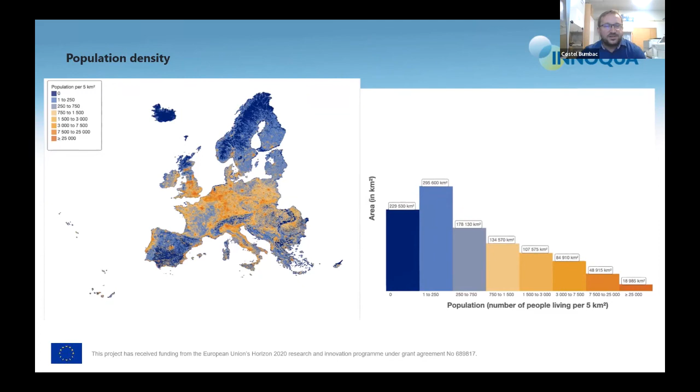Where there is a low proportion of population connected to wastewater treatment facilities, it may be because of lack of financial resources or priority for providing sanitation services, low population density, or too high a proportion of the population living outside agglomerations.

This low level of connection to wastewater treatment systems is caused by a combination of the three factors mentioned earlier, especially the low population density and the high proportion of the population living outside agglomerations.

For the case of Romania, approximately half of the population lives in a rural environment, and only 10% of them are connected to central wastewater treatment systems.

In dispersed communities, wastewater collection infrastructure may prove prohibitive in terms of cost, and the cheaper alternative could be the installation of several individual, group, or cluster sanitation systems adapted to local conditions.

Once the issue of big contributors to pollution load, agglomerations above 150,000 and above 10,000 people equivalent, is solved, the focus of investment will be the smaller agglomerations of 2,000 to 10,000 people equivalent and less, in order to achieve urban wastewater treatment objectives, and why not the United Nations Sustainable Development Goal 6, sanitation for all. A combination of drivers, including utility market restructuring, water and wastewater directives, and improved efficiency, have encouraged cities and public water utilities to resume the most aggressive investment programs Europe has seen since 2007.

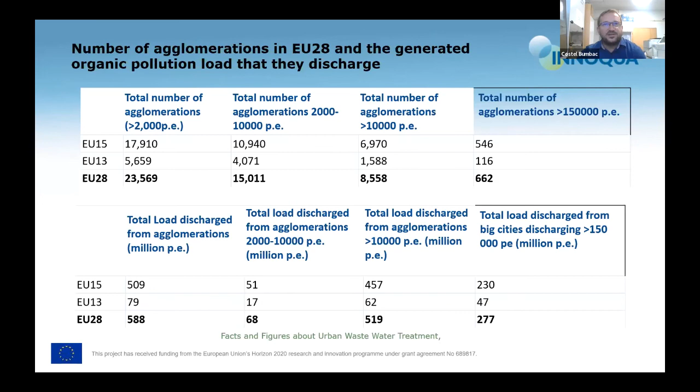Bluefield Research anticipates annual water infrastructure investment to increase by 23%, from 46 billion euros in 2015 to 57 billion euros in 2025.

In many countries, small communities are required to treat wastewater discharges to increasing standards of lesser environmental impact, but must achieve the goal at locally sustainable costs.

While biological treatment such as activated sludge or membrane bioreactors are quickly becoming the industry standard for centralized wastewater treatment plants, and would also be ideally suited for small plants, its investment and operation costs are usually too high for that class of application. It is not always appropriate to connect to the public wastewater treatment system, for instance in remote areas or scattered communities with low population density.

Suitable alternatives to connection to the public sewage system may include individual sanitation systems, packaged wastewater treatment plants, or nature-based solutions such as vermifilters, drain fields, and even septic tanks with regular removal of solid waste would be better than nothing.

Consequently, small treatment plants are generally configured as anoxic or aerated biological tanks with little sedimentation, making them quite susceptible to hydraulic load changes, sludge quality changes, and consequently performance loss.

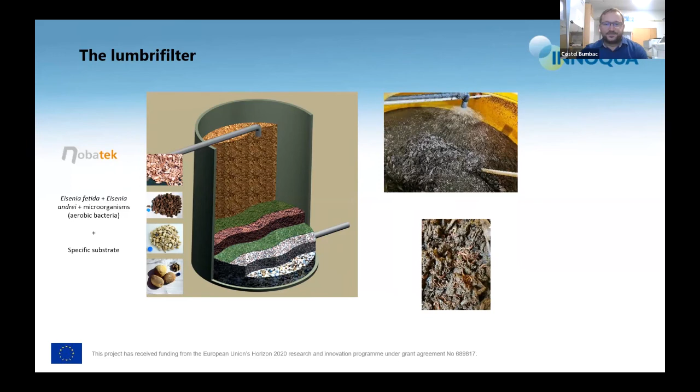Constructed wetlands are designed to use the natural functions of wetland vegetation, soil and their microbial population to treat wastewater. Even though sometimes nature-based solutions represent a more expensive approach for wastewater treatment, analyzing the merits and drawbacks of the various NBS in view of their sustainability potential might lead to the conclusion that natural-based solutions could be the way forward towards the goal of sanitation for all.

Encouraging the development of local water cycle clusters with local reuse and recycle of the resources, and possibly local recovery of energy and/or materials.

I would be happy to answer any questions if you have. We will also have more chances for us to ask some questions to Costel. I don't know if there was anybody who would like to address some questions at this point. If not, Costel, thank you.

I think this presentation clearly shows the grounds to work on sustainable and affordable solutions, especially for dispersed communities. So in an attempt to tackle this problem, the INNOQUA project investigates the applicability and potential for nature-based decentralized solutions.

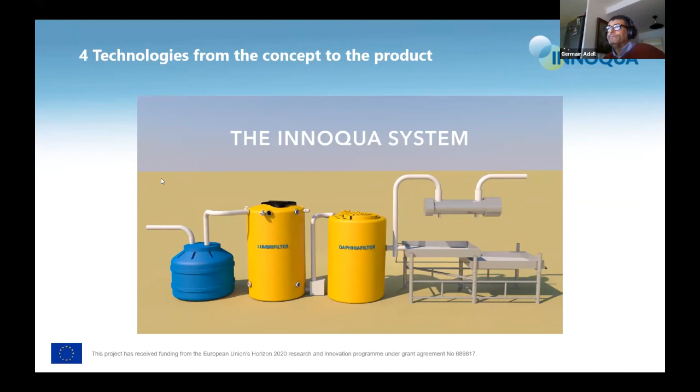So we have 4 technologies, and from that we brought the concept to an industrialized product. You see here the Lumbrifilter, the Daphnia filter, the biosolar purification, and the last stage with the UV filter. So here are the technologies.

I won't comment a lot on them, but the Lumbrifilter, slightly presented by Costel, is a primary and secondary treatment based on the activity of earthworms and bacteria.

The Daphnia filter is a tertiary treatment. For us, in the modular technologies, we always had the Lumbrifilter as a first stage, then the Daphnia filter. Daphnia are little crustaceans that feed themselves on very fine suspended solids.

Then we have the alternative of using the Daphnia filter or biosolar purification, an innovative treatment using solar activity and biofilm - biofilm microalgae that remove some nutrients and pollutants - and then, when needed, we can have UV disinfection as the last stage.

So all this makes a modular system that, of course, at a certain moment we have had to plan how we demonstrate it. So here you see this was already demanded or suggested by the topic at the time. The topic suggested that we could invite extra-European partners, and so we really did that. We went for that because we consider that sanitation is a global problem.

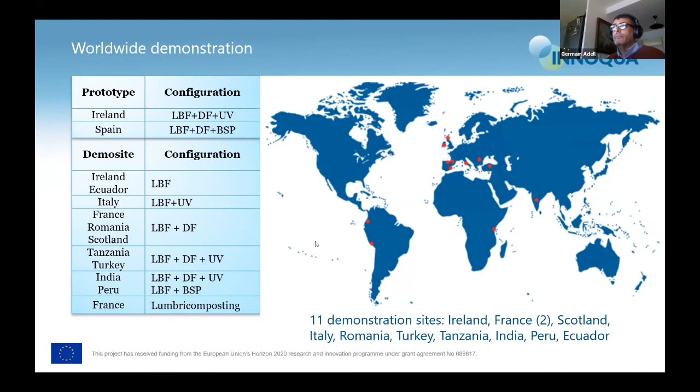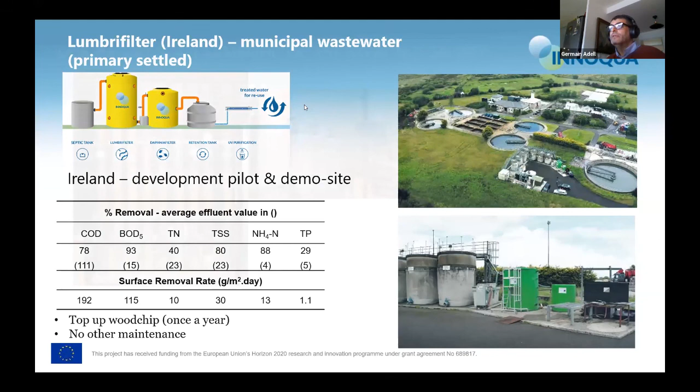So of course we had all the wastewater we needed, and NUIG worked with the full system, testing it, developing the substrate, gathering scientific information on the system and testing different solutions. So here you can see their testing of different layers of wood chips or substrate. It was really very thoroughly analyzed and developed by NUIG. So we ended up improving the first idea we had as technology provider, thanks to the help of NUIG and other partners. They also had an agricultural demo site, cattle farming.

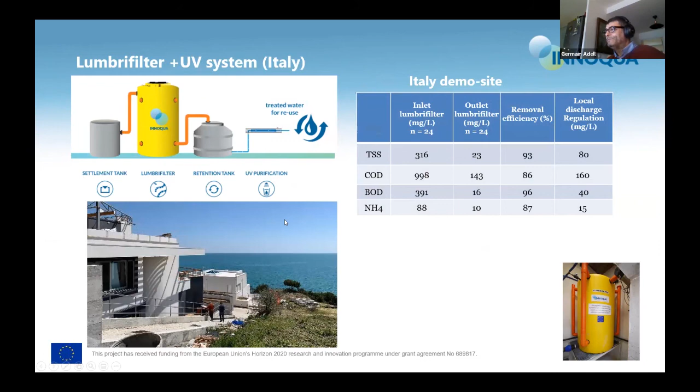If you have any questions, Costel will be more than able to comment. And perhaps, Costel, I would like you to comment. The last two slides are the results of the pilot sites. Costel has been the pilot manager of the full project, and I think he's more qualified than myself to comment on the last two slides, which are the summary of what the project team found out after the demonstration phase.

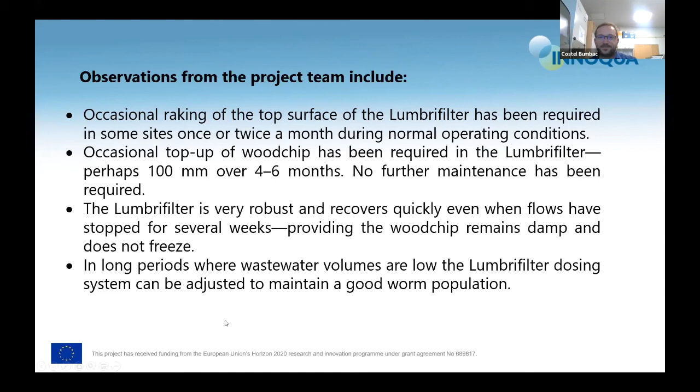On the other hand, the Daphnia filter requires a little detailed attention at startup, as Daphnias are known to be sensitive species. They are usually used in ecotoxicity studies. And at the same time, the coexistence of macroalgae or even water plants in the Daphnia filter improves the reactor nutrient uptake rates.

On the other hand, the performances of the biosolar purification, which is the microalgae-based wastewater polishing step as a module in the INNOQUA system, the performances of the BSP are dependent on maintenance, meaning that the microalgae biofilm should be occasionally raked and removed in order to keep the nutrient uptake rate, as the main mechanism of nutrient uptake in the microalgae-based wastewater treatment system is by biomass uptake.

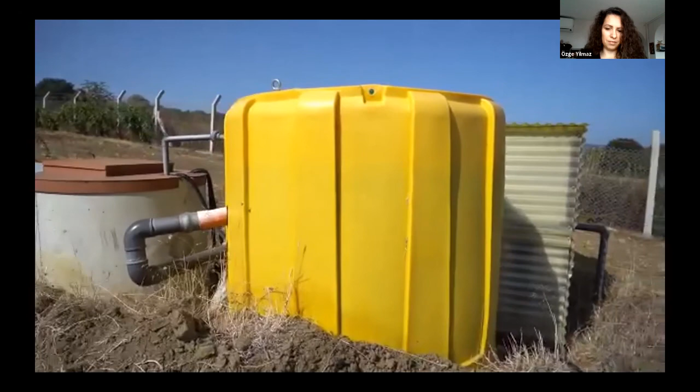The SINOP demonstration is to assess the potential of INNOQUA technologies in residential housing, as well as potential for reuse in irrigation. Our system here includes a lumbrifilter, a Daphnia filter, and a UV unit. The INNOQUA system is located in a housing complex with 8 detached houses and hosts up to 55 people. The wastewater is of domestic origin, coming from the bathrooms, toilets, and kitchens. And the INNOQUA system here has a design capacity of 3 cubic meters per day.

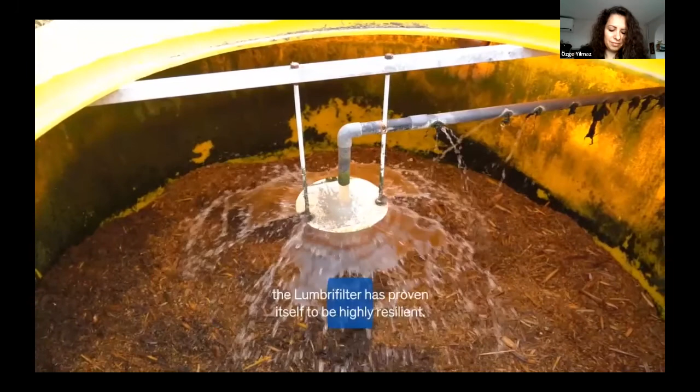The lumbrifilter presented the benefit of reduced maintenance and operational costs. Throughout the operation, even with varying quantities of wastewater, the lumbrifilter has proven itself to be highly resilient. The Daphnia filter performed an important role as an innovative bio-based tertiary treatment, which avoided use of chemicals for treatment and also supported the reuse of treated wastewater on site. Turkish regulations on water and wastewater are especially strict in terms of the presence of pathogens if the wastewater is to be reused for irrigation. With this UV unit, we were able to disinfect the treated wastewater, comply with the regulations and ensure safety of the reuse.

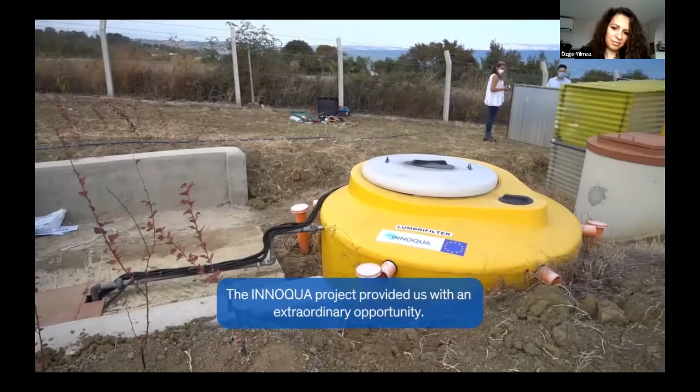So this portion of the conference is dedicated to us, Costel and me, trying to give you some information about our respective demo sites. So I will start with Turkey, and Costel will go on with the Romanian demo site. Sinop is located on the northern tip of Turkey, on the Black Sea coast. It has a population of about 200,000 people living in the city center and nearby villages. Almost 90% of the population have access to the sewage system, but 10% of the population use septic tanks as their main form of sanitation.

The septic tanks usually infiltrate, so we can easily say that the water is infiltrating into the groundwater without any treatment. So instead of the wastewater in the septic tanks being collected, it goes into the ground. So our beneficiary was this site, which hosts up to 55 people. It's a residential complex with 8 detached houses.

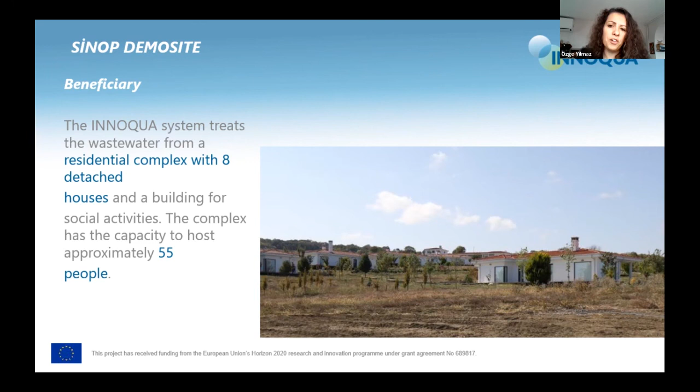The site owners are very aware of the possible environmental pollution they might be creating while living in this housing complex. It's actually a new complex being established, so some settlement started at the beginning of the project, but we did not reach full settlement. Not all the houses were occupied until the end of the project. So this site is still under development, but they wanted to make sure that an affordable treatment system was ready on site for them to be using.

The system that we implemented on site, as you have seen in the video, has a capacity of 3 cubic meters per day. The source of the wastewater is very domestic. What we wanted to do was to assess the potential of the INNOQUA technology to be implemented in residential housing.

Of course, one interesting point for this demo site was the site owners really wanted to use the wastewater after treatment for irrigation purposes. They had some orchards, and they have some green areas that they wanted to use the wastewater for irrigation.

For this purpose, it was found out that the best configuration was to use the Lumbrifilter, the Daphnia filter, and the UV purification. Disinfection was especially necessary because the Turkish legal limits for reuse of wastewater are rather strict, so we needed some sort of disinfection at the end of the treatment.

As I said, unfortunately, not all the houses were occupied throughout our demonstration, so the influent was significantly lower in terms of both concentration and volume expected. And also one side information, Sinop, the Black Sea region in Turkey, receives a lot of rain throughout the year, especially in autumn and winter. So we also have a lot of stormwater, rainwater infiltrating into the sewage that also caused the concentration to go even lower. After the first 160 days, we needed to find a solution.

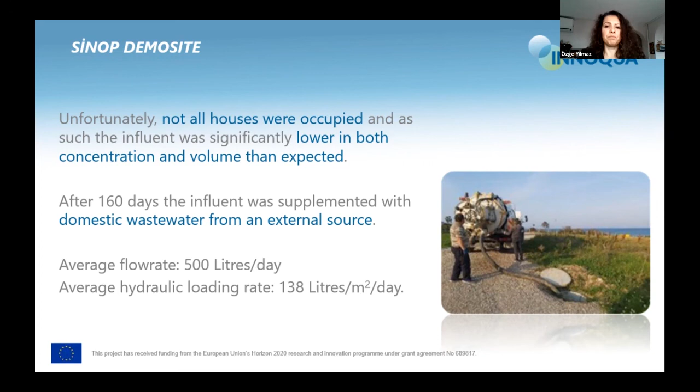The Lumbrifilter, we put it into operation in July 2019. In general, the Lumbrifilter was observed to be highly resilient to variable conditions. And on top of the lack of wastewater, we also had to go through the COVID situation, the lockdowns and everything. So the site was almost empty because the residents weren't able to travel; this is kind of like a summer house for them. So they were not able to travel at all, but particularly during the COVID-19 lockdown, we have seen that the Lumbrifilter is very resilient and very, very robust.

Regarding the analysis results, the performance in the demo site seems sufficient, especially for the Lumbrifilter to provide the primary and secondary treatment that it needed to provide. And our second system, the Daphnia filter, was put into operation a little bit later in November 2019. The removal rates were variable during the demonstration phase because the consistency of the wastewater and COVID actually impacted the Daphnia filter a little bit worse than the Lumbrifilter.

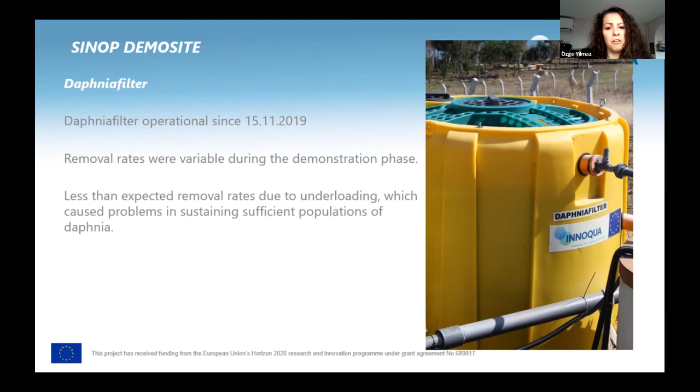So we have received less than expected removal rates due to underloading, which caused problems in sustaining a sufficient population of Daphnia. So Daphnia being a little bit more vulnerable than the Lumbrifilter, we have experienced it. It was a little bit hard for us in our case to sustain sufficient populations.

So when we look at the system performance overall, the average performance, we have seen removal of total suspended solids, BOD5, COD, ammonia, and total phosphorus. Also, turbidity was reduced because of the treatment in the system. And we, of course, have seen removal of fecal coliforms because of the disinfection.

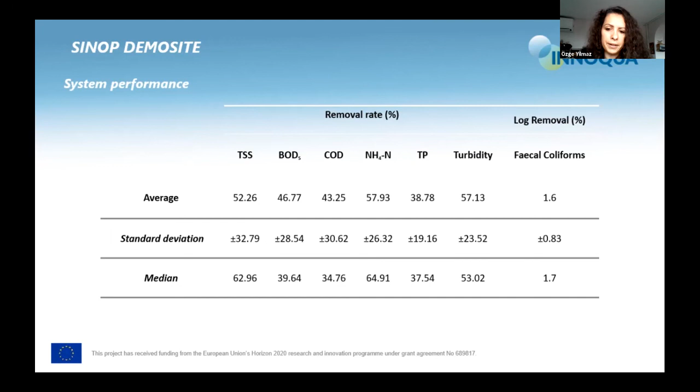So I will just give you a brief summary of the removal performance. The Lumbrifilter presented significant average removals for ammonia and turbidity, and also TSS, BOD5, and COD were removed. Although the Lumbrifilter was not specifically designed to eliminate phosphorus, the efficiencies for this parameter averaged around 48%, which was very good news, because if the Lumbrifilter is used without another tertiary treatment option, it can still remove some nutrients. The Daphnia filter contributed to removal of all parameters, including turbidity.

So we have seen that the combination of Lumbrifilter and Daphnia filter was effective in terms of removing the key parameters that are desired to be reduced according to our legislation. An average of 1.6 log removal was achieved in the UV unit. So in the end, we are sure that with more constant wastewater, with the correct concentrations, because we have already seen that in the controlled environment experiments, the removal rates are very satisfactory.

So even with the problems that we have on site, we have seen significant removal despite our conditions. So what were the practical issues that we encountered during operation? Lack of wastewater and inflow was a problem. We remedied it with the transfer of wastewater from external sources, but of course there might be other solutions, because we were discussing, since these are earthworms, to be honest, they are magnificent in terms of consuming almost everything. So there might be other solutions to keep them alive, even if in future years on site there might be some lack of wastewater itself.

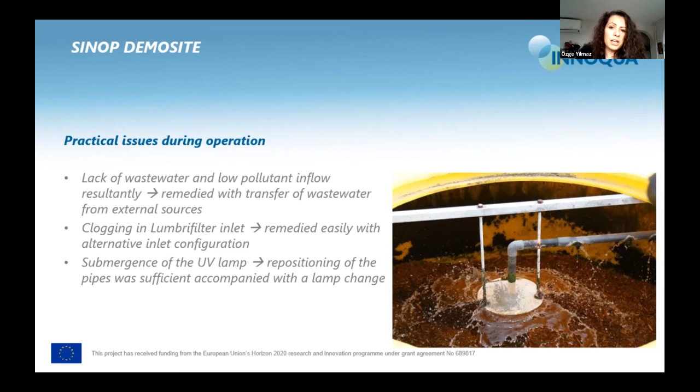We had some clogging in the Lumbrifilter inlet, but that was remedied very easily with alternative inlet configuration. That was one day's work for us, so it was very easy to handle these types of situations with the Lumbrifilter. We had a little problem with the submergence of the UV lamp. It always needs to be submerged in water, so we just needed to reposition the pipes. That was sufficient to solve the problem. So the thing is, except for the wastewater situation, whichever operational problems we had, it was easily remedied.

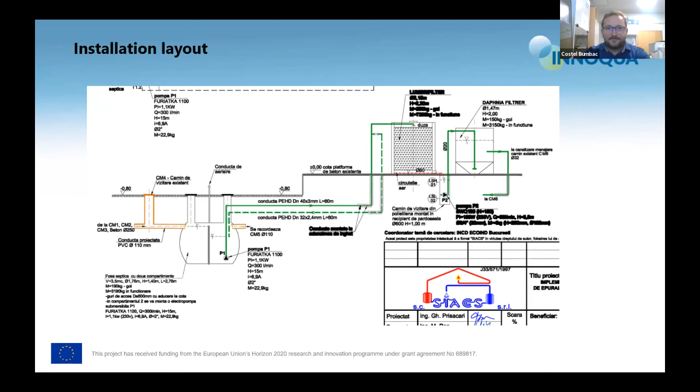Afterwards, the water is repumped to the Lumbrifilter. The effluent is sprayed on top of the active layer of the Lumbrifilter and passes through the active layer, where bacteria remove dissolved nutrients, while earthworms consume the TSS and regulate the microbial biomass so that clogging of the system is avoided.

Then the effluent of the Lumbrifilter passes through the Daphnia filter, configured as a tank inoculated with local species of Cladocera, Daphnia magna, which are free to move up and down the water column. Internal weir and baffle mechanisms ensure the Daphnids remain within the reactor, while additional surface area is provided for the establishment of microalgal or bacterial biofilm, which helps in the nutrient removal process.

Being operated in real environmental conditions, the influent wastewater quality varied widely, with COD concentrations ranging from 450 to 1,500 milligrams per liter, BOD from 125 to 681 milligrams per liter, nitrogen ammonium from 19 to 98 milligrams per liter, and total nitrogen loads from 53 to 207 milligrams per liter.

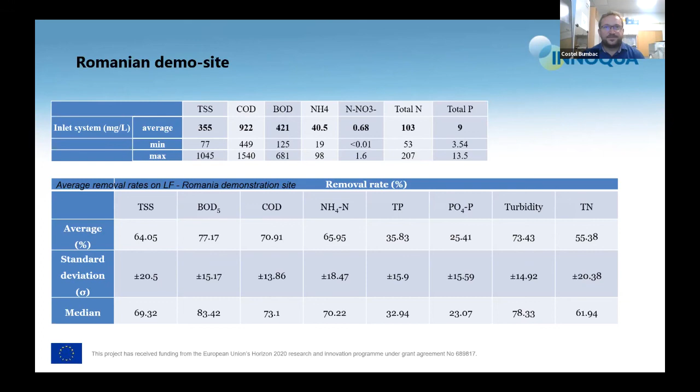However, you can see here that after approximately 1 year of operation, once the hydraulic loading rate decreased from 0.7 to 0.3 cubic meter per square meter per day on the system, the treatment performance improved considerably, meeting at most time the discharge limits. The Lumbrifilter proved reliable as a solution for decentralized wastewater treatment.

However, due to some issues with the Daphnia's adaptation, as we used laboratory-bred Daphnia species, usually used for ecotoxicity studies, so pure culture of Daphnias, we couldn't properly assess the feasibility of using Daphnia filtration as a polishing step for the specific climate of Romania. However, in other demonstration sites, for example in Spain, India, and Peru, Daphnia filtration has worked consistently and proved feasible.

Thank you for your attention.

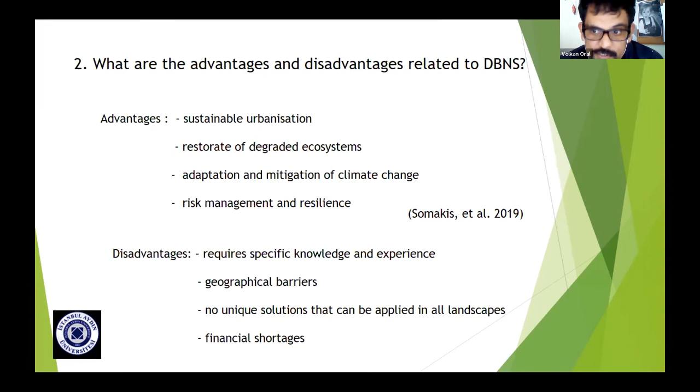But there are also some disadvantages, because NBS is not a new or emerging terminology - it has been discussed in the last 10 years. Of course, the disadvantages are it requires specific knowledge and experience. There are also some geographical barriers. There is no unique solution that can be applied in all landscapes. And of course, financial shortage - money is in short supply.

Okay, so what are the opportunities for integration of NBS into urban infrastructure related to this concept? I would like to discuss this under two groups. One is related to water management, and I can also give an example about some other projects which are currently being done or already finished Horizon 2020 projects.

And NBS can contribute to urban landscape. There are 5 important things I would like to mention: natural and constructed wetlands, riparian buffer strips, urban green spaces and green buildings, and reforestation activities.

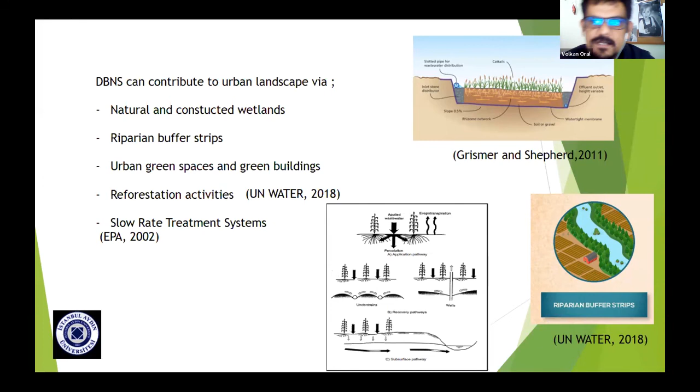But there is one more thing I would like to share. As previously our colleagues mentioned about the 2 demonstration sites, one in Turkey and one in Romania - actually, basically, they are currently related to a kind of slow rate treatment system. So we can say these types of NBS are a kind of improvement method based on slow rate treatment, though of course there are some modifications and implications going on. Basically, we should say it started with the slow rate treatment systems, and over time it developed, and now we're speaking about nature-based solutions.

They are, according to me, the most important examples related to urban infrastructure. The green roof is a kind of eco roof or planted roof. You can see on the figure there are some layers. It's very convenient and feasible to use, and nowadays it's used in many locations across Europe and in various locations around the world.

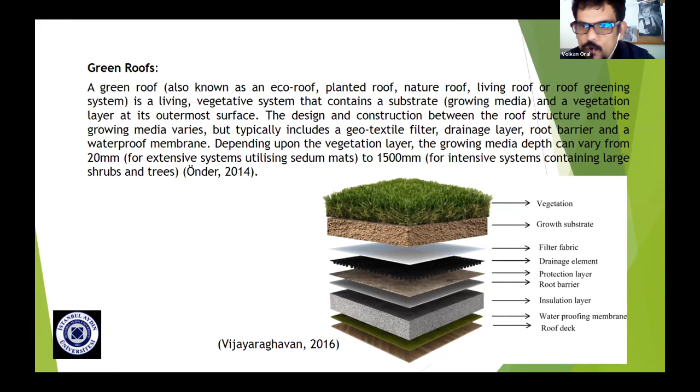The vegetation layer is so important because a couple of months ago I read news from China where they used green roofs, but the wrong types of vegetation caused some troubles with root cohesion and root problems.

There are also benefits, three types of benefits: ecological benefits, economical benefits, and other public benefits.

As for ecological benefits, that's related to water management and stormwater management, and improving air quality. For economical benefits, fire retardation and urban agriculture, which are so popular right now. And other public benefits include aesthetic improvement, improved health and well-being, and educational opportunities.

Green walls are coming from history. It's not a new thing, using only a vegetative site or vegetation site. From an architectural point of view, the aesthetical values are high, but also during hot summer it provides shade opportunities. Because evaporation takes place on the surfaces, it's a good thing to use on the walls of some buildings.

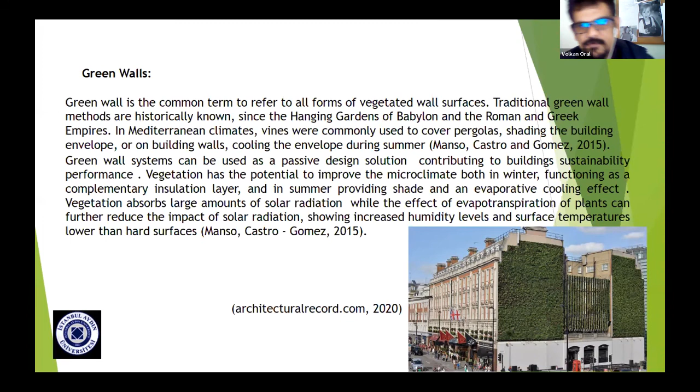So in conclusion, I would like to be as simple as I can. These are important tools for adaptation and mitigation of climate change. Of course you can add more under this. Most important for me, they help build resilient societies and allow us to establish environmental policy and planning.

These are the words I would like to share with you, and this is the references and internet sources I used. If you want to address me any more questions, I'm here. Thank you.

So, Volkan Hocam, thank you. First, I would like to ask one question, maybe two, because this is a very interesting topic, and you presented very well, especially about the multiple benefits of NBS, because this is something we should be aware of. Not only do we gain environmental benefits when we apply nature-based solutions, whether within cities or in rural areas, there are always multiple benefits: societal and economic benefits as well.

So you mentioned the importance of selecting the right type, because it can also cause some structural problems. For example, in another Horizon project, we are working on cultural heritage and implementation of NBS to a certain extent. So it's important to choose what type of system we are implementing, whether green roofs or green facades, based on local conditions, I guess. Can you give some examples of how we can determine these types of conditions?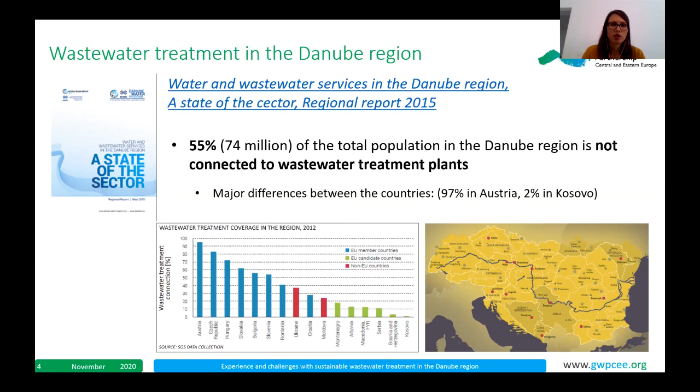From the report, it can be seen that 55% of the total population in the Danube region is not connected to wastewater treatment plants. Of course, there are major differences between the countries: 97% of the population is connected in Austria, and on the other hand, we have Kosovo with only 2% of the population connected to wastewater treatment plants.

Of course, the report and the data refer to agglomerations that have more than 2,000 inhabitants, because this is what the Urban Wastewater Directive of the European Union demands from the countries. These agglomerations have a significant water load to the environment, and specifically the agglomerations with more than 100,000 inhabitants present 45% of the total wastewater load in the Danube region.

And still in this area, so with the settlements with more than 2,000 inhabitants, there is a lot of work to be done, because 18% of these settlements still have no collection of wastewater, and an additional 10% have wastewater collection but no treatment. And then if we look into the settlements that have less than 2,000 population equivalents, the situation is even worse. So these settlements actually represent 40% of the population in the Danube River Basin, which is actually a lot.

And in Global Water Partnership in Central and Eastern Europe, we actually found similar data for the Central Eastern European region. In 2011, we did a small study that was focused on nature-based solutions for wastewater treatment in these small settlements. What we found out with the study was that, of course, a lot of population lives in these small settlements. For CEE, this is 30%. So a bit lower than for the Danube region.

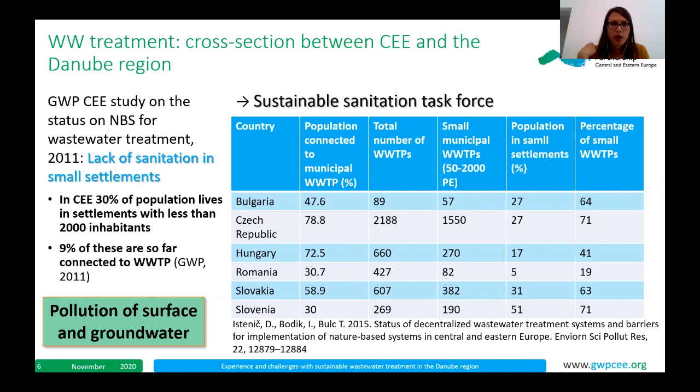So because the situation is actually quite bad, the GWP in the region decided to establish a sustainable sanitation task force. This is a special network inside the GWP network that joins the experts working with sustainable sanitation. And the group has been quite active since 2007. Since that time, we have published a few books and literature that were mainly focused on nature-based solutions in rural areas. Among them was also a guidebook on NBS for wastewater treatment that is available online and is also used as a textbook at technical studies in some countries in the region.

Then later on in 2016, we were involved in a Danube project. This was a smaller project that was focused more on the Danube region. And here the GWP CEE got a chance to increase the network and to get more stakeholders from the Danube region. In 2017, we were involved in the elaboration of a feasibility study for innovative wastewater treatment in the Danube region. This project gave some interesting results and I will present them later on.

Since 2018, we are also involved in the COST Action, which was also mentioned in Volkan's presentation just now. And in the last 2 years, our main work was actually applying for different international cross-border Horizon projects where we could apply these sustainable sanitation topics.

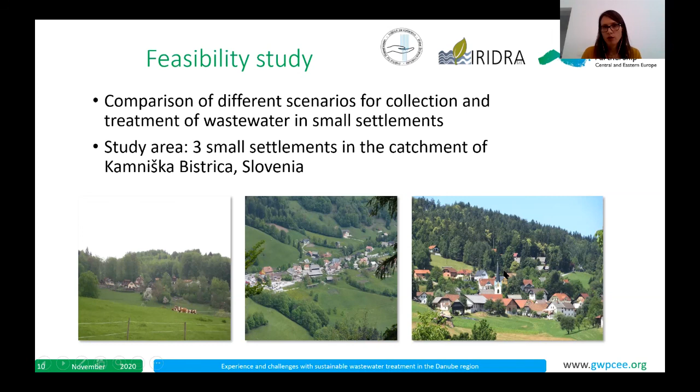So in the feasibility study, we evaluated both scales that were already mentioned today, so centralized option and decentralized option. In the centralized, we proposed treatment of wastewater from the whole settlement at one treatment plant, and in decentralized options, you can have treatment of wastewater at individual houses or in a few houses together.

So the technologies that were included in the feasibility study can be grouped into 3 major groups. The high-tech group included a sequencing batch reactor and membrane bioreactor. These are actually 2 technologies that are quite commonly implemented in this region. In the nature-based solutions, we had different options of treatment wetlands, from more sophisticated forced bed aeration wetlands to more classical or robust ones like horizontal flow treatment wetland.

In the resource-oriented group, we included in the study the algae bioreactor, with which one can produce algae biomass that can be used as a fertilizer in agriculture, then a zero-discharge willow system to produce willow wood chip as an energy source for household heating. And we also included treatment wetlands with water reuse as resource recovery.

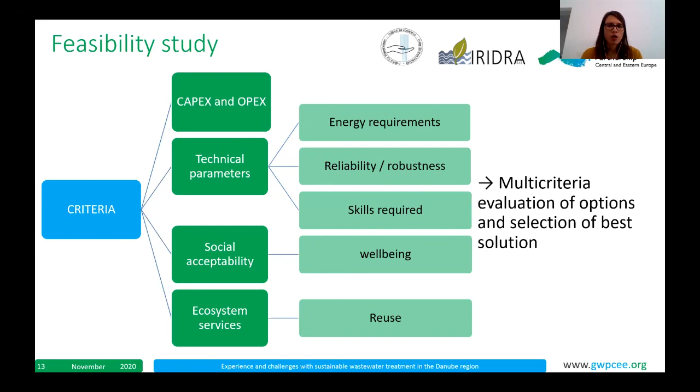So after setting all these criteria, a multi-criteria evaluation of different options was carried out, and then we selected the best solution. I wouldn't go into the process of this selection, but I would like to point out the result. So the results showed that a decentralized approach can enable numerous advantages, economic, social, environmental, but only if robust technologies are applied. So technologies that are reliable, that can withstand hydraulic and pollutant load, and that do not demand a lot of maintenance.

So in this region, this would mean that we would suggest French treatment wetland in case of treating wastewater from the whole agglomeration, because with French treatment wetlands, as you may know, you can treat raw wastewater and you don't need pre-treatment. Then for individual houses, a horizontal flow treatment wetland would be the most feasible option. And in cases where there is not enough space available, then SBR would be most feasible. So we know which approach to take and we know which technologies to promote.

And now the next are the challenges that we face for further implementation of these solutions. I would list just some most important challenges, or the ones that we recognize as the most present. So one is, of course, the legislation gap. As was already mentioned today, the Urban Wastewater Directive does not refer to the settlements below 2000 PE, and the countries then have to solve the problem by themselves. But on the other hand, luckily, there is the Water Framework Directive, and they have to meet a good water status of their surface and groundwater. So this is somehow an indirect obligation to also treat the wastewaters.

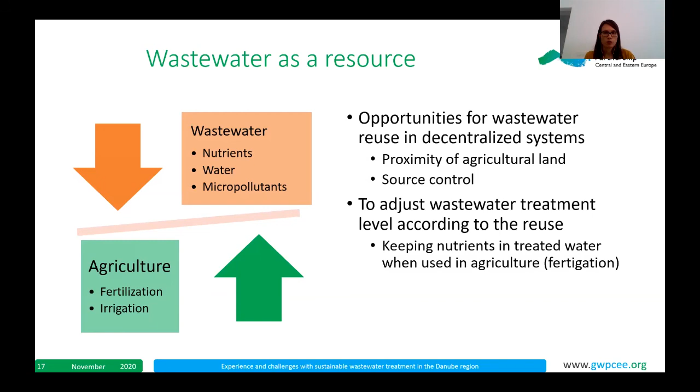So the Sustainable Sanitation Task Force of Global Water Partnership Network has somehow defined mindset. We know that in the future we will need a lot of small treatment plants to treat wastewater from small settlements. It will be needed in Central and Eastern Europe as well as in the Danube region and elsewhere in the world. We know that a decentralized approach is the one that can bring more benefits and that robust technologies have to be applied. We also know that these technologies have to be integrated with resource recovery, because this is actually the only way to reach sustainable sanitation.

So for the end, I would point out the basic findings and our way to go. Global Water Partnership in Central and Eastern Europe wants to promote nature-based solutions as robust technologies that can offer integrated water management. And there is still a need to raise awareness with different stakeholders, also at policy level, and to attract governmental institutions in such projects. From our work, we can say that it's difficult to attract governmental institutions into projects because they don't see so big interest in sustainable sanitation in rural areas.

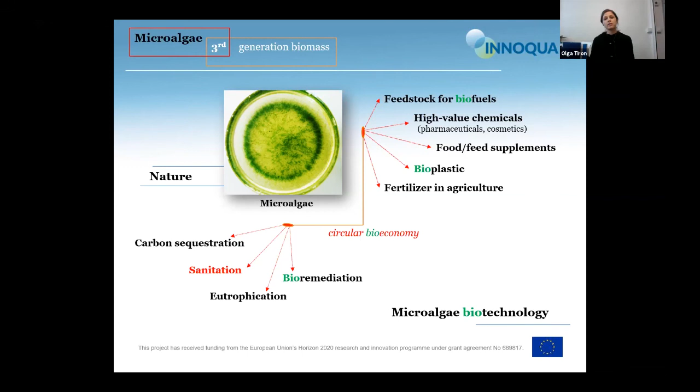and addressing as a solution to current environmental issues, as for example, greenhouse gas emissions by carbon sequestration, ecosystem pollution by bioremediation potential, or even sanitation issues. All these features made microalgae one of the targets of the circular bioeconomy.

The beginning of the microalgae biotechnology path was represented by biomass cultivation, a direction initiated mainly as a result of food resources depletion caused by the World War II period. Once agriculture recorded an upward trend after the war, the interest for microalgae cultivation for protein production decreased.

However, the interest switched to using microalgae for domestic wastewater effluent polishing, the idea being to harness microalgae metabolic features to avoid eutrophication phenomena caused by the discharge of nutrient-rich effluents, overloaded with nitrogen and phosphorus. There are two main criteria that sustain this idea.

First of all, we're speaking about the symbiotic relationship occurring in natural ecosystems between microalgae and bacteria. The core principle of the symbiotic relation harnessed in the wastewater treatment process is represented by a nutrient support exchange established between microalgae and bacteria.

Microalgae populations provide oxygen supply by photosynthesis, which is consumed by aerobic bacteria for organic matter degradation and nitrification processes as well. Released macronutrients after degradation, mainly nitrogen, phosphorus, and inorganic carbon, are captured by microalgae for cell growth, implicitly for photosynthesis.

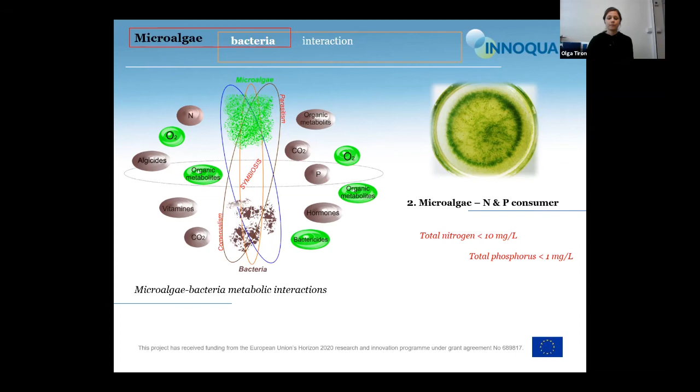But now let's take a closer look at what impact occurring microalgae-bacteria interactions could have on both wastewater treatment operation and microalgae cultivation systems.

First of all, microalgae can be used not only in the tertiary treatment step, but also for secondary treatment, resulting in an integrated technological flow that increases the socioeconomic and environmental impact, as microalgae cultivation and wastewater treatment technology based on activated sludge faces various constraints and drawbacks.

Regarding production of microalgae biomass, wastewater provides the necessary nutrients and water resources for the microalgae population, with only inorganic carbon supply required, representing up to 27% of the total cultivation costs.

Moreover, phosphorus represents a limited resource with a high depletion risk in the next decades, and nitrogen is considered an important limiting factor in assessing microalgae biorefineries' sustainability and potential scaling.

Regarding the advantages that could be achieved by using microalgae-bacteria biomass for wastewater treatment, the following could be pointed out: decreasing or eliminating CO2 gas emissions, which is the main contributor to greenhouse gas emissions.

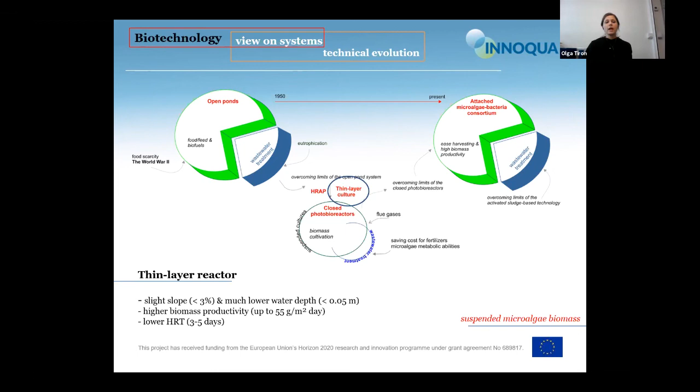Close to that period, high-rate algal ponds were tested for secondary and tertiary wastewater treatment, mainly for domestic and agricultural water resources. This type of pond is characterized by a small depth and is provided with a mixing system, which allows an increase in photosynthesis activity and organic matter removal efficiency.

They also have a lower hydraulic retention time. However, they are characterized by low biomass density and biomass productivity, and require a wide land surface, even 50 times higher than that needed for the activated sludge process.

Compared to open ponds, photobioreactors allow better and easier operational control and higher biomass productivity. However, they require high operational costs, especially for mixing, which could be even 15 times higher than that required for open pond systems.

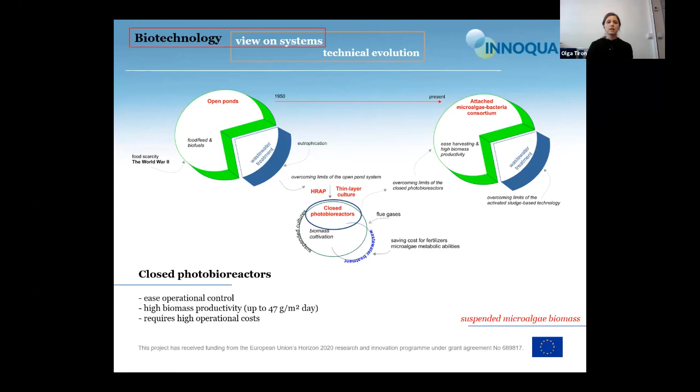With about 3 decades since the first signs of microalgae biotechnology development for wastewater treatment, algae-based biofilm reactors hold the latest step in this history. Advancement of this type of system was not as visible as suspended microalgae applications, since algae-based biofilm presented mainly interest in wastewater treatment processes rather than commercial biomass culturing. Algae-based biofilm represents a dense, multi-layer biological structure consisting of a mixed population of microalgae and bacteria, developed by physical, chemical, and biological attachment mechanisms on the surface of a specific material.

What are the strengths which promote the use of a biofilm system instead of suspended cultures for wastewater treatment? First, regarding harvesting, attached biomass can be easily harvested by scraping, with no energy input requirements. Biofilms also have higher biomass density, up to 100 times higher compared to open pond systems, allowing a decrease in operating land surface. The biomass organization also allows decreased biomass water content, with scraped biofilm having humidity levels similar to that resulting after centrifugation, meaning this can exclude the harvesting step, thus saving energy.

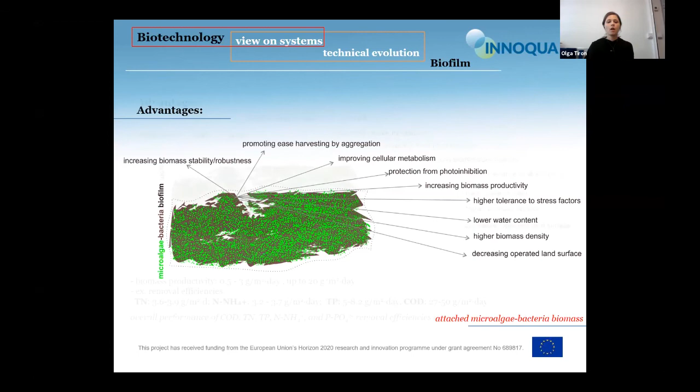Biofilms have higher biomass productivity. Commonly reported performance for algae biofilms ranges between 0.5 and 3 grams per square meter per day, but could reach even around 20 grams per square meter per day. Biofilm properties sustain higher wastewater treatment efficiency compared to suspended cultures, with high robustness found for a wide range of wastewater types, and they can sustain both nitrification and denitrification processes through uneven oxygen distribution.

In terms of wastewater treatment performance, organic matter and nutrient removal efficiencies vary widely, depending on multiple factors such as reactor design, scaling, involved microalgae and bacteria species, influent loadings, and harvesting frequency. The impact of harvesting frequency must be especially pointed out, as it influences photosynthetic activity, ash content, biofilm stability, effluent content, and the predator community is also a very important factor.

Studies on microalgae bacteria biofilms were conducted mainly at laboratory scale on a wide range of wastewater sources, but a lack of experience with large-scale biofilm application was noticed. Outdoor studies performed account for less than 10% of related publications found. Further, several important achievements will be outlined here, gained from microalgae bacteria biofilm testing for effluent polishing at laboratory scale and demonstration sites within the INNOQUA project.

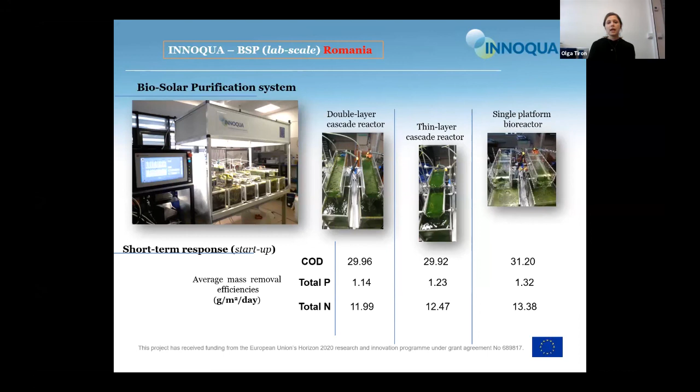A long-term assessment of reactor performance after the startup period underlined an increase of organic matter, total phosphorus, and total nitrogen removal efficiencies in line with increasing solids retention time. However, a prolonged exponential growth phase of the biofilm affected pollutant removal efficiency, outlining the importance of harvesting frequency on system performance.

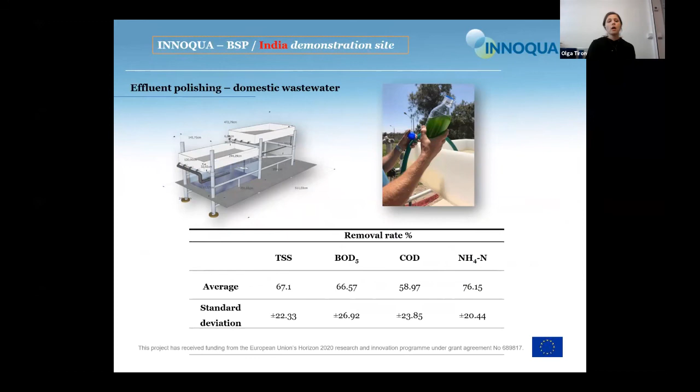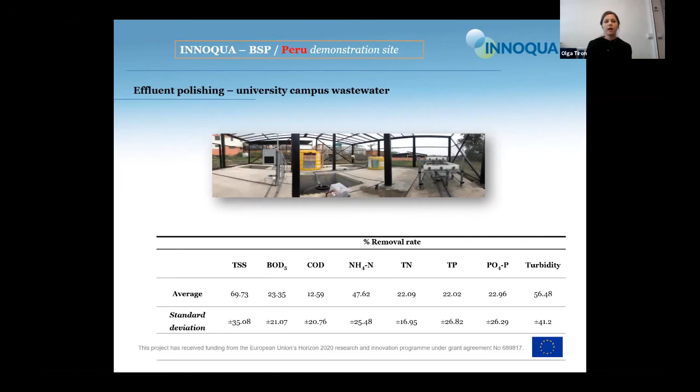And from Peru, more detailed information about system performance related to advanced treatment steps using microalgae-based biofilms in different geographical locations could be provided upon request. Thank you for your attention, and if there are any questions.

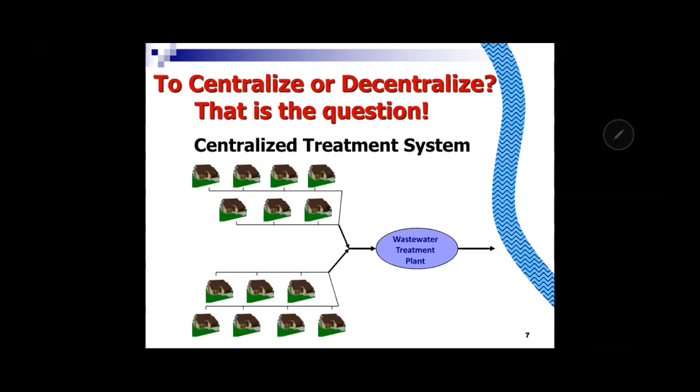He gave us this idea to centralize or decentralize — that was the question. My idea was also to have such kinds of courses, but at the time we didn't have such courses within our university. It was 1997.

But then I was convincing one of my professors to have some studies on constructed wetlands. Why not have a master thesis, for example, on constructed wetlands?

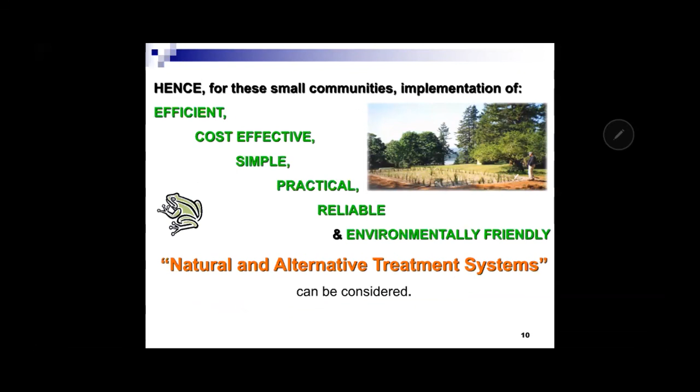Most of you were talking about centralized treatment systems, so I will not go into detail. Constructed wetlands for small communities can be a solution because they are efficient, cost-effective, simple, practical, reliable, and environmentally friendly. These are also called natural and alternative treatment systems, or at my time, eco-technologies. As one of the decentralized treatment systems, due to their efficient organic matter removal, high nutrient capturing capacity, low construction and operational maintenance cost, low energy demand, and high potential for creating biodiversity, constructed wetlands can play an important and vital role in water resources management, especially for developing countries.

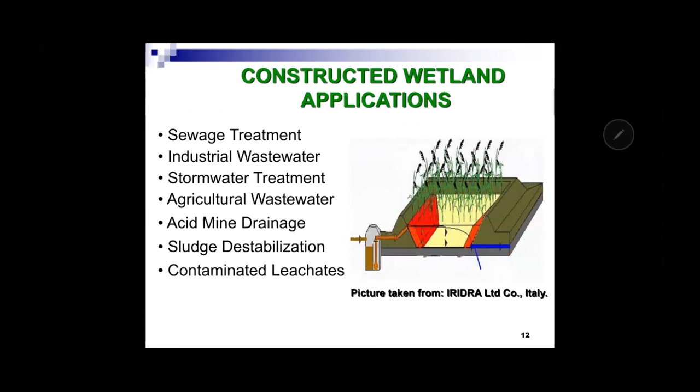We can use constructed wetlands for applications like sewage treatment, industrial wastewater treatment, stormwater treatment, agricultural wastewater treatment, acid mine drainage, sludge destabilization, and contaminated leachates.

There are types of constructed wetlands based on the flow of water: free water surface flow wetlands, subsurface flow constructed wetlands, and vertical flow wetlands.

There are, of course, advantages and disadvantages of constructed wetlands. The advantages include reliable total suspended solid, COD, and nitrogen treatment efficiency, simplicity of the method, low construction costs, no need for high technological equipment, low energy maintenance, formation of wildlife habitat, and use of biomass from harvested aquatic plants.

However, there are some disadvantages. For example, high land area requirements per person — it starts from a minimum of 1 square meter and can go up to 10 square meters. Sometimes they can also be breeding grounds for insects, and there are climatic constraints. The necessity of a receiving water body, as for treatment plants, is also needed.

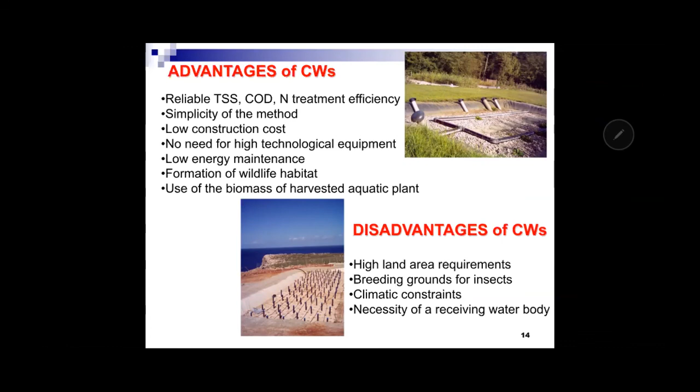There are some possible expenses of constructed wetland applications: the engineering design of the project, land cost, excavation, sealing material, fill medium — which we also call substrate — distribution and drainage pipes, plantation, water collection tanks, submersible pumps, control panel equipment, and the workers. Of course, you can also add the plantation cost for the plants.

So I decided to work on such a study — feasibility of a constructed wetland in the Mogan and Eymir system. It was my master thesis, where I was simulating and using a model for constructed wetlands in order to remove nitrogen and phosphorus efficiently — the nitrogen and phosphorus levels in a eutrophicated lake. I was suggesting to the government such a system: what would happen if we had constructed wetlands on top of the rivers feeding Mogan Lake in Ankara.

When I finished my master thesis, I was really feeling passion for constructed wetlands, because very few people were working in Turkey at that time on this topic. My dream, as we had in our master course, was to apply a pilot scale constructed wetland at the university campus. So I convinced two professors in my university — one from the biology department, one from the environmental engineering department. By the way, I studied biotechnology for my PhD.

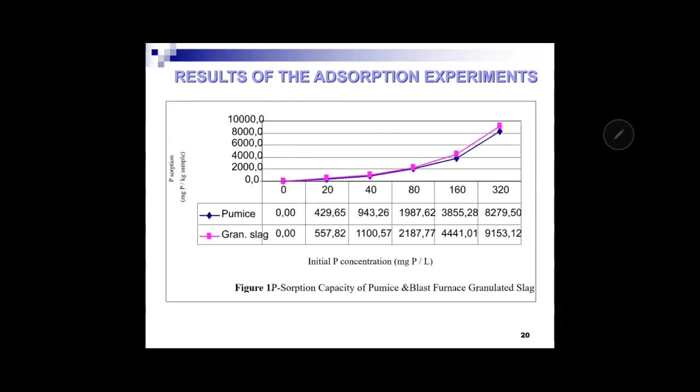Then I was doing some batch scale experiments in order to compare the efficiencies, the adsorption capacities of pumice and blast furnace granulated slag. And this blast furnace granulated slag from Turkey, from the Black Sea region, was showing slight differences, and it was showing higher efficiencies.

Thus, I was contacting them and asking for a sponsorship, because at that time people were not thinking about such kind of projects. They were thinking it's kind of funny, you know, so what are you doing? Ecotechnology. Therefore, I couldn't find any fund for my PhD research, but I didn't give up. So I continued to contact the people. So as an industrial waste, the blast furnace granulated slag was used also within my system.

Of course, we had lots of experience and also funny memories, and some of them are not so funny memories, you know. I was going to the field and looking for the manhole, and we had to build something in the manhole so that we were able to pump the wastewater, and I had to find also sedimentation tanks and excavate and blah blah blah.

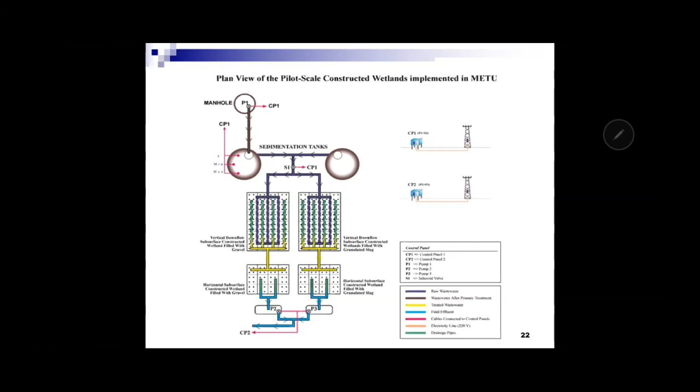So here are some pictures and some cross sections where I was using mainly two types of constructed wetland systems. The first one was the vertical flow one, where you can apply the wastewater through the perforated pipes, and you have different layers of the substrate. And the second basin, we can call them also constructed wetland beds, was horizontal flow.

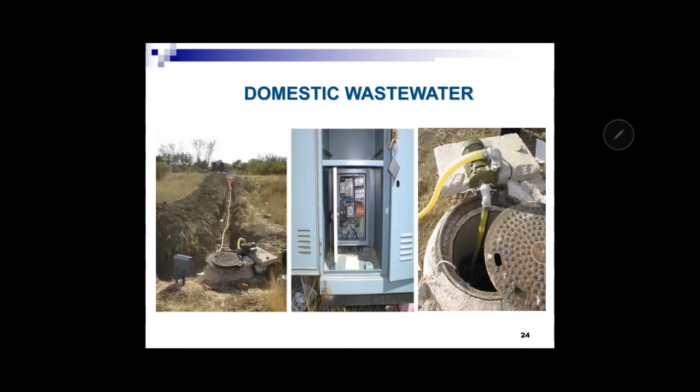But for example, what happened was the first pump was stolen by the gypsies from the field. I was crying because it was difficult for me to buy the pump, but afterwards I had to find another sponsorship to get this pump. And for the sedimentation tanks, I was lucky enough when I was going to the recycling activity area. I found 2 identical old boilers, and we cleaned them and redesigned them as sedimentation tanks. So we were able to put them into the field.

And of course, I didn't have workers because I didn't have much money for paying them. So my dear friends helped me. I was asking my assistant friends and the students from the student clubs of my university, and we were applying this step by step within the field.

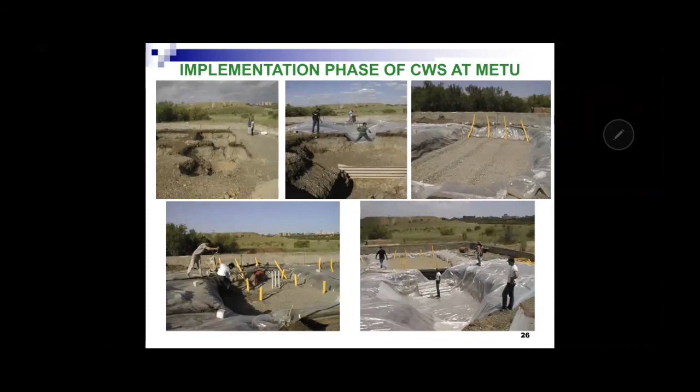Okay, I'm going very fast because I don't have much time. So you see here some of the pictures, some application of the drainage pipes and so on.

And I had to lose 1 year because of these reed plants. Everybody was saying, okay, it's so easy to plant them, they really just resist and so on. But I really lost 1 year because of the plantation. We were planting them and they didn't survive.

And afterwards I had to really tube them, like baby trees, like seedlings, 1,000 of them, and we had to keep them in the greenhouse at my university campus. And afterwards we were planting them again. After a month of applying the real domestic wastewater, they were happy. So I was able to continue with my research.

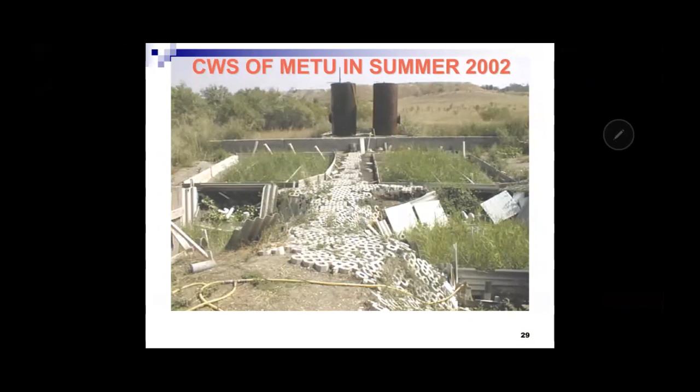I was going there every day and giving 3 cubic meters of wastewater to each of the beds. I was applying the domestic wastewater after the sedimentation. It was totally 6 cubic meters per day, so it was almost like a little treatment plant for 60 people, and it is one of the pioneering studies for constructed wetlands in Turkey.

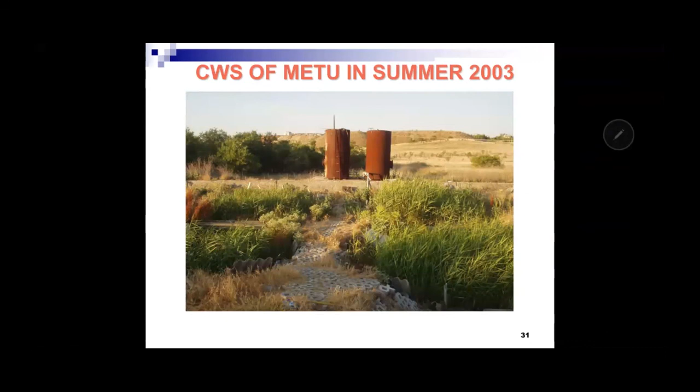And after 1 year, the plants were really growing, and I was applying the wastewater, for example, with a hydraulic loading rate of 0.11, etc. You can maybe have this presentation afterwards if you are interested.

But the plantation cost, so when you want to apply this, for example, in Europe, then you have to really pay money also for the plantation because you need the baby plants. And the slag was also a gift of the Iron and Steel Company. Therefore, maybe it is not the exact amount, but still you can have an idea.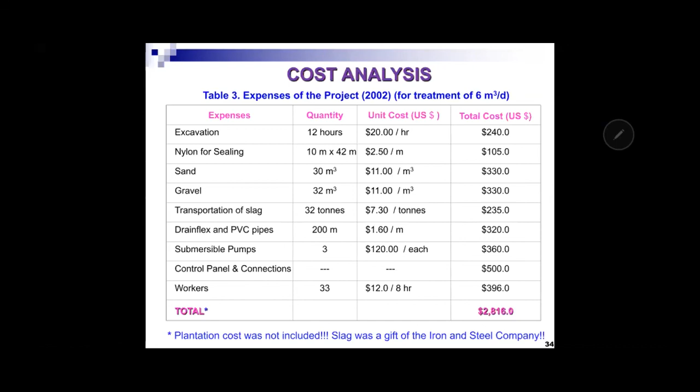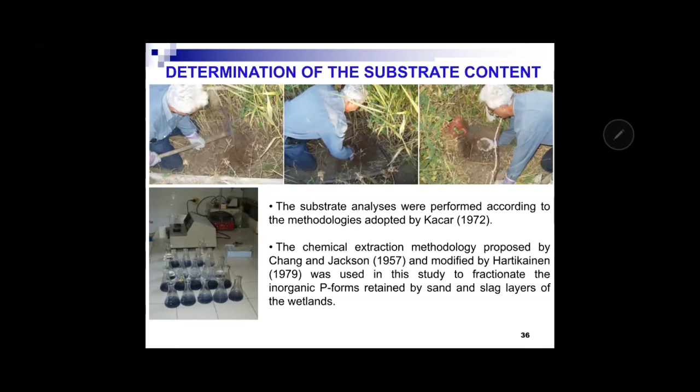After finishing the monitoring study for 1 year, so that I was able to observe it for 4 seasons, then, this is also my lovely father. He was also helping me, and we were removing from the constructed wetlands the plants and the stones, so the substrate, so that I was able to have a mass balance study, in order to understand what was the treatment effect of the plants and also the substrates on the treatment efficiency. As far as I remember, it was only 10% the effect of the plants on total nitrogen and phosphorus removals.

And as a conclusion, this study indicated that properly designed and operated subsurface flow constructed wetlands have a great potential for secondary and tertiary wastewater treatment in Turkey. And as being one of the leading studies for implementation of pilot scale constructed wetlands in Turkey for treating real domestic wastewater, this study has contributed to the understanding of how subsurface flow constructed wetland systems performed under the prevailing climate in Ankara.

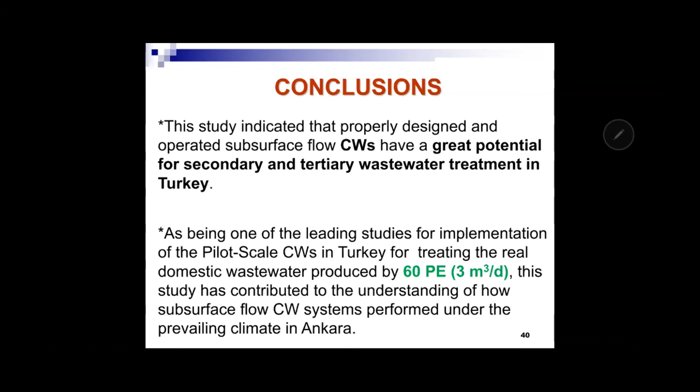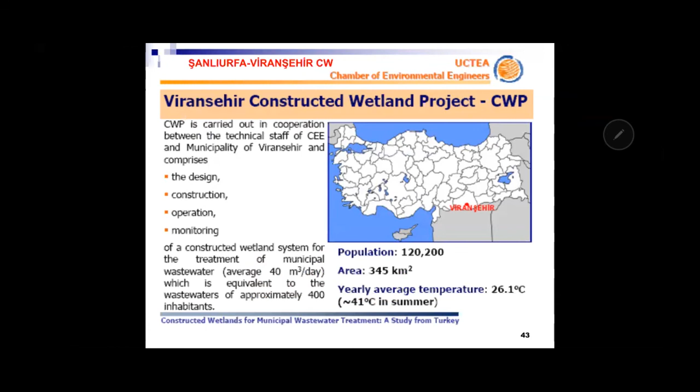And before finishing my PhD, again, there was an opportunity to apply a bigger full-scale hybrid constructed wetland for 400 persons in Şanlıurfa, Viranşehir in 2003. It was because of a project, and the Swiss Agency for Development and Cooperation was supporting the Chamber of Environmental Engineers of Turkey. So we had the opportunity to apply it in Viranşehir, in the southeastern part of Turkey. So I was able to design the constructed wetlands depending on my experience from my PhD. So again, we were monitoring, and here is also the plan of the constructed wetland.

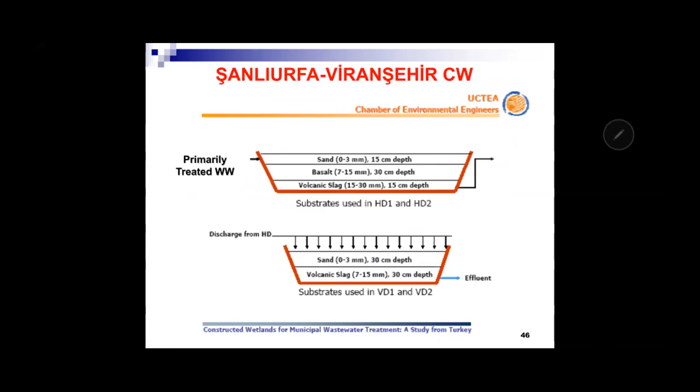In this case, I was using the subsurface horizontal flow constructed wetlands in the first treatment stage. Of course, we had again the settling tank and so on. And at that time, there was a volcanic mountain nearby, and we used the volcanic slag and basalts in the system. And when we were applying it, first of all, the area was an old municipal solid waste disposal area, so we had to rehabilitate the site. And afterwards, we were applying also compacted clay at the bottom.

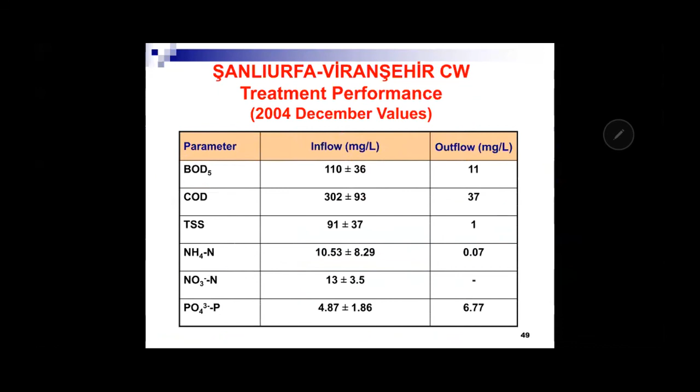And again, we were planting. But this time we didn't lose 1 year, because we had the experience, so we planted again, and there was the opening. But unfortunately, afterwards, there were some problems because of the maintenance and operation. This is also one of the important things we have to keep in mind, I guess.

And just before finishing my PhD, I was coming up with the idea, what about establishing my own startup company on constructed wetlands in Turkey? It was in 2003. And I had some courses on how to manage this, but according to my business plan, having a private company on constructed wetlands in Turkey in 2003 was not feasible. I was very upset, but then I said, okay, but I really want to continue working on constructed wetlands. So I had 2 postdocs. One of them was in Hania in Crete, and the second one was in Vienna as a Marie Curie Fellow for 2 years. Both of them were on constructed wetlands.

I just want to give short information because I don't have too much time, I guess. So I prepared in Hania in 6 months a manual of practice on constructed wetlands for wastewater treatment and reuse in Mediterranean countries. And the objective of the manual was to provide theoretical and practical knowledge of the constructed wetland technology to the engineers, researchers, and stakeholders who are interested in designing, constructing, operating, and using constructed wetlands as an alternative option for water quality enhancement and reuse, especially for small agglomerations in rural areas of several Mediterranean countries.

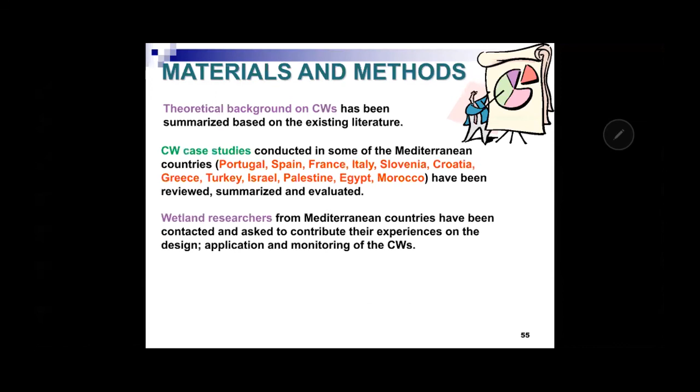Theoretical background on constructed wetlands has been summarized based on the existing literature, and constructed wetland case studies conducted in some of the Mediterranean countries have been reviewed, summarized, and evaluated. Wetland researchers from Mediterranean countries have been contacted and asked to contribute their experience on the design, application, and monitoring of the constructed wetlands. And good practice guidelines have been developed for future constructed wetland applications in the Mediterranean countries.

If you wish, you can also find this manual on the website of ResearchGate. Okay, and the aim of the good practice guidelines was to avoid repetition of the bad experiences gained during the former constructed wetland applications and to minimize failures which can be faced during application and operation maintenance of the constructed wetlands while implementing them in Mediterranean countries.

Okay, so the manual was about 400 pages. It had an introduction, historical development, and some of the constructed wetland studies in the Mediterranean region, the good practices guidelines and results, and some recommendations, of course, the references and appendices. One of the outcomes of the manual was that the great majority of the governments or relevant agencies of the Mediterranean countries did not accept constructed wetlands as a state of the art treatment technology when it was first introduced.

However, at the end of the 1980s, several research studies on constructed wetlands started in most of the Mediterranean countries by private companies, research institutes, and universities. As a result, in the middle of the 1990s, several installations of constructed wetlands treating wastewater originating from individual houses, small agglomerations, industries, agricultural runoff, farms, and touristic facilities existed in the Mediterranean region.

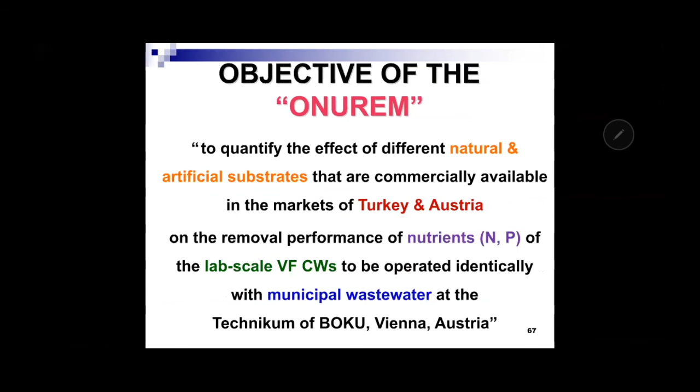And last, I continued in Vienna with this study. It was also a European Union project: optimization of nutrient removal in constructed wetlands using special substrates and numerical solutions. The objective of ONUREM was to quantify the effect of different natural and artificial substrates that are commercially available in the markets of Turkey and Austria on the nutrient removal performance of lab-scale vertical flow constructed wetlands, operated identically with municipal wastewater at the Technikum of BOKU in Vienna, Austria.

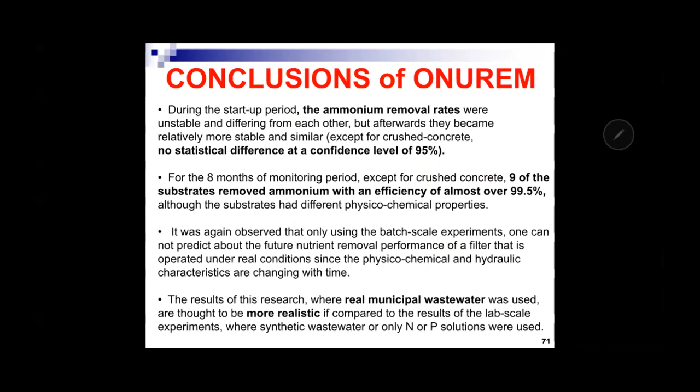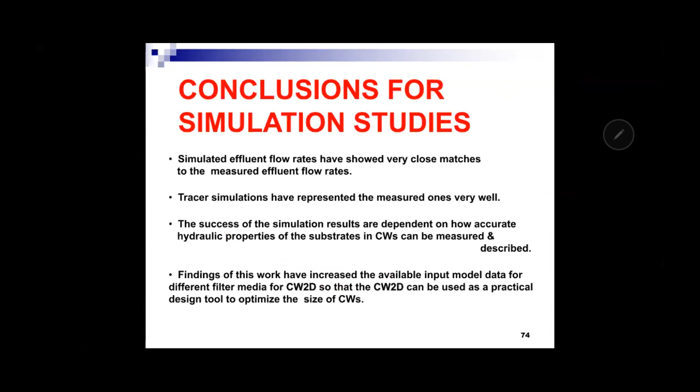The simulated effluent flow rates showed very close matches to the measured effluent flow rates. Findings of this work have increased the available input model data for different filter media for constructed wetlands, so that the constructed wetlands two-dimensional model can be used as a practical design tool to optimize the size of constructed wetlands. Okay, this is my last slide.

It was a bit fast, but in conclusion, constructed wetlands can really play a very important role in water resources management and sustainability in our region. However, constructed wetland technology is not a zero energy, fix and forget wastewater treatment system. Moreover, constructed wetlands are not simply made up of sands, stones, pipes, and magic plants eating all the pollutants. The design and its application need a sophisticated and interdisciplinary approach.

Nevertheless, my own experience on constructed wetlands in Turkey indicated that properly designed and operated constructed wetlands really have great potential for secondary and tertiary wastewater treatment in Turkey and in developing countries in the near future, if, of course, the legislation allows.

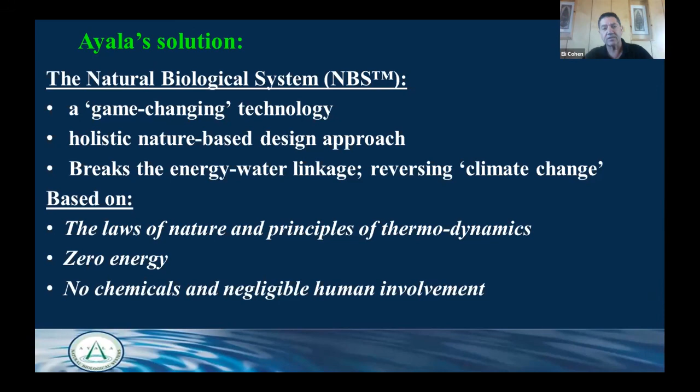Very effective, we all know how it works. Plants introduce oxygen to the root zone, exudates all together. The volume of activity in this area is 1,000 times more than in activated sludge, for example. Very effective, very efficient, and everything is degradable.

You just need to play with, rightly, the components. I'm talking about the hydrology, which is very important. Talking about the plants, talking about the substrates, the gravel, the additives that we're adding, natural ones. All together create a very powerful system in the root zone that can do anything we want. We just need to design it properly.

And it's also about water harvesting, stormwater harvesting, treating them, recharging the aquifers. It's about preventing floods. It's about reducing the temperatures in the urban area.

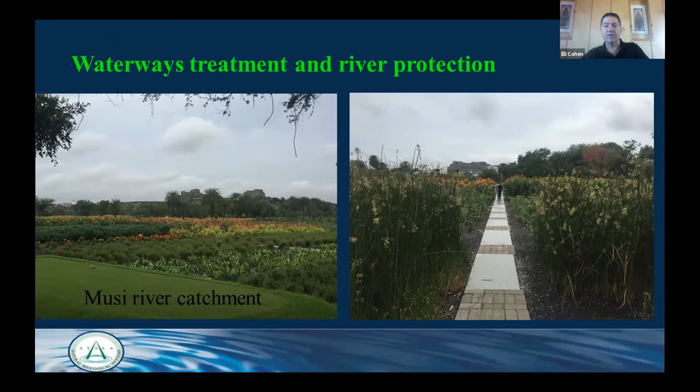And why do industries go for it? Because they have to - they're forced to, and this is the most economical solution that you can think about. The quality is getting better and better through the years. We have experience with so many others in industries - cosmetic, pharmaceutical, even radioactive elements we harvest and treat.

Now let's go to the domestic examples. I think Volkan, you spoke about what's called the green city, something like that. We are doing it, and actually Delhi is going to look like that. It takes some time, but in the end of the day, it's something like that. You take the sewage from this neighborhood, you treat it over here in these gardens, and then you use the ornamental pond, very clean water, and in the end of the day it goes for irrigating the entire area over here. This is another one.

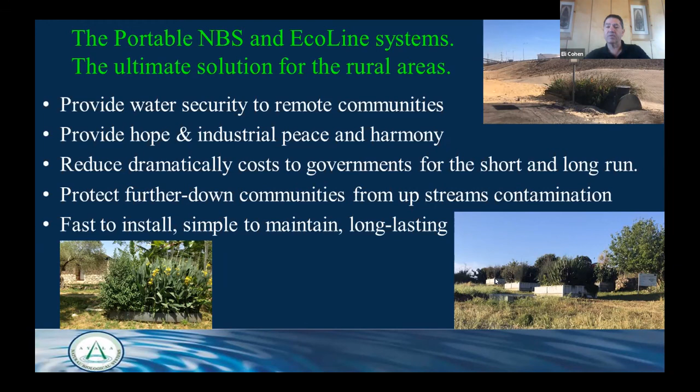This is the bigger one. It can treat up to 40 cubic meters per day. It's quite big, but you have smaller sizes too. You can see them over here - the EcoLine 3, the 2, the portable, in different places - and it's all doing the job very efficiently.

Just to summarize, this is a must, it's not anymore kind of a tree-hugging fashion. It's about changing the rules of the game, and we have to do that. It's a must because we cannot keep on using energy as we used before, and of course people are looking for something that will also be social, a system that will be part of our life, not something we have to put apart. We don't have any nuisance like smell or noise, just part of our lives existing near our place.

And this, again, I'm saying this is the future, and you are in the field, and I'm happy that I happened to meet David and speak to him in order to show the potential. It will be lovely to keep in touch with all of you and just to push it forward. If you have any questions, please do.

I'm checking the audience for questions. Well, in the meantime, Eli, this was a very impressive presentation. Thank you very much. So the changes that happened, to see them, it's very eye-opening, to be honest, and also I think you had a very good point about cutting the dependence on water and energy, the energy-water nexus. It's very important within the framework of NBS. Of course, we are concentrating more today on water management, but we should always be aware that NBS can be great tools for climate adaptation for cities and rural communities. I think this was also mentioned a couple of times in previous presentations.